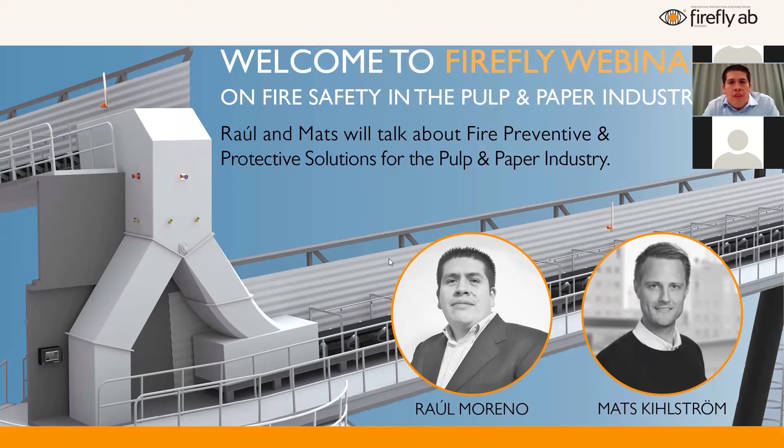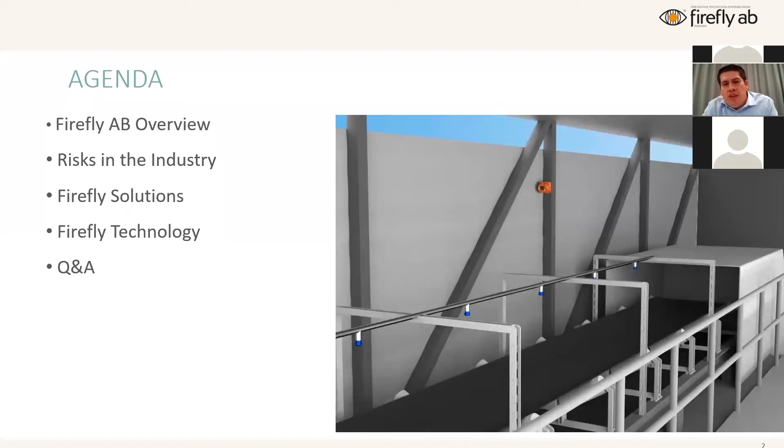So we start with a little bit of agenda. We will do an overview of Firefly. We will talk about risks in the industry, Firefly solutions, Firefly technology, and Q&A. So if you have questions when some of the subjects pop up and we're talking about it, just put the questions in and then we will look at it.

Okay, so Firefly, we are a Swedish company. We're speaking today from our head office here in Stockholm. I hope that everybody, you and your families, are doing fine, in good health in these complicated moments. We have been in Stockholm for the past 47 years. We are a Swedish company, as I said before. We have different approvals from FM and other organisms.

We are focusing on clients, on the client process, and by saying that, what we do is tailor-made solutions to your process. So we are always looking at the industrial side of things. We have proven reliability, and also we are a global company, meaning that we have a global reach, not only in selling systems, but also in supporting.

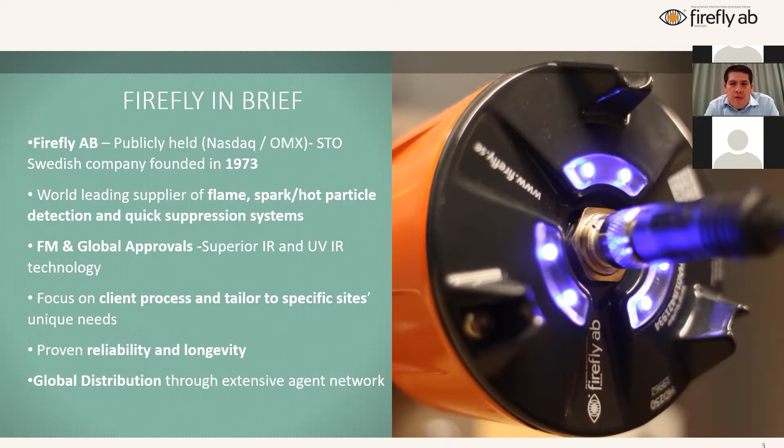As Mrs. Faria was telling you, I'm responsible for the part of Portugal, Spain, and Latin America. But as myself, there are other colleagues that are in charge of different regions of the world, Europe, Asia, North America, and then also my colleague Mats Kihlström, he's in charge of solutions for the pulp and paper industry.

So this is one of the industries that Firefly is servicing as a Swedish company. We started 47 years ago, focusing on wood panel, woodworking solutions mainly. But as the years have gone by, we have specialized in different solutions, not only in tissue or wood-related products, but also in fields so different like recycling, power generation, food, and tobacco.

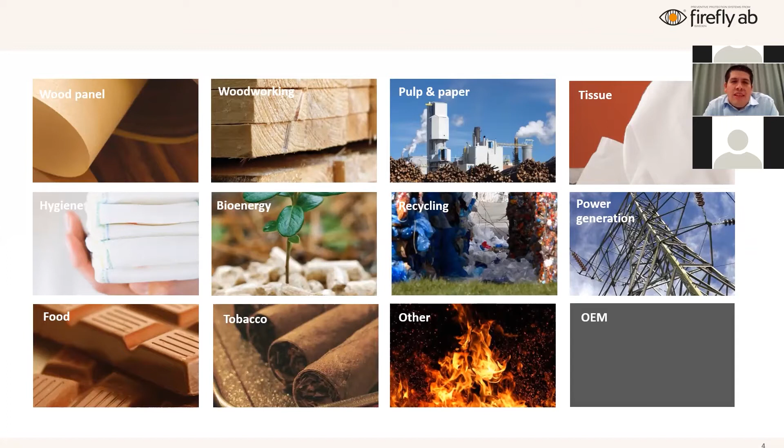So in every process there is a risk of having a fire, not because it is a failure of the process itself, but because the process itself has materials that could cause this fire. That is where Firefly has been focusing on special solutions.

We have, let's say, two Firefly protection system families, and the first one is based on prevention systems. And on prevention systems, we have two main solutions. One is a spark and hot particle detection system, and a second one that we call MGD, or electronic nose. This name may sound a bit strange, but we call it electronic nose because the detectors that we use here actually work like our nose, meaning that, for example, when you're at your home and some of your neighbors are doing a barbecue, you don't see the barbecue itself, but you smell it, and your brain together with your nose identifies that that's a barbecue.

So that's why we call it electronic nose, because this detector is able to detect a fire in the first stages, where only the gas particles are being produced and the reactions are being produced at this level. So in this part of the systems, we are doing detection and extinguishing of ignition sources before the fire or the explosion has occurred.

And then we have a second big family that we call protective systems. In these systems, we have the quick suppression system, which is basically a quick detection of the flames. And when I'm talking about quick detection, our detectors work at around 300 milliseconds. I will talk about that later on. But the whole idea is to detect and extinguish or suppress the fire in less than 5 seconds. Although we have these two families, a Firefly solution often combines both technologies, preventive and protective. This is for an optimal safety solution.

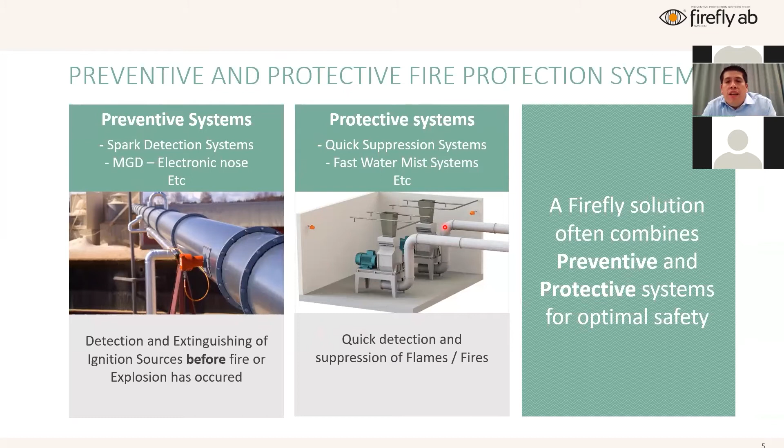Now going into today's main concern, fire risk. Here we have some examples of fires that have happened in different industries in the last couple of years and months. In all of them, we're talking about conveyors. Normally, a failure of a conveyor is caused by friction and overheating of the bearings. In this case, in Sweden, the loss was equal to 20 days of production, and they could only recover 7 months after the incident.

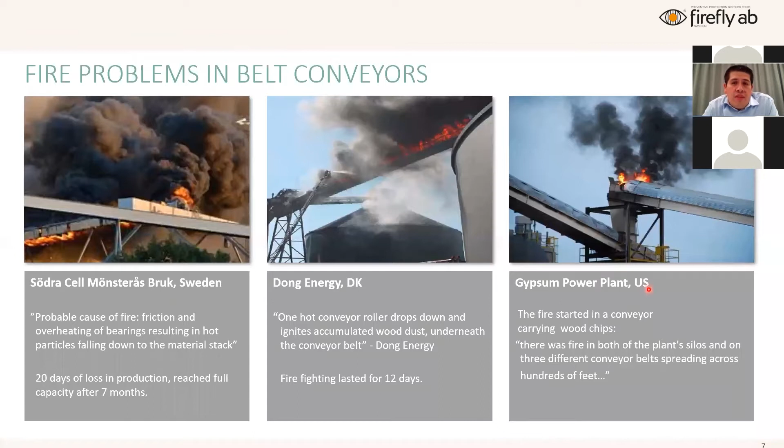This one in Denmark, the firefighting lasted for 12 days. And then this one in the US, it was a conveyor that was carrying wood chips. The fire, unfortunately, was not only on the conveyors, but also in the plant silos. And of course, normally when you have a fire in this type of machinery, the consequences spread to other sides of the factory.

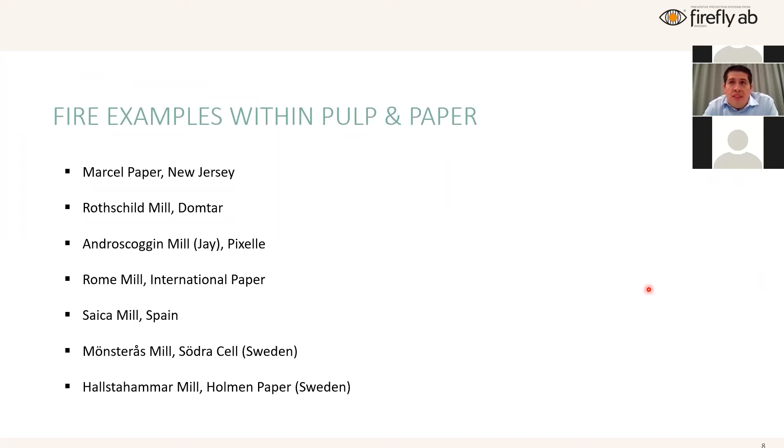Other examples in pulp and paper throughout these last 2 years: we know the tragedy at Marcel Paper in New Jersey, Rothschild Mill in Domtar, closer to Portugal, Saica Mill, they also had a fire there. And here in Sweden, we have Mönsterås Mill and Hallstahammar Mill. So all these examples show us that, unfortunately, fires and incidents related to fire or dust explosions are present in the pulp and paper industry.

After this brief introduction, now my colleague Mats will talk about the applications that Firefly has developed for this market. So I give the floor to Mats. Hello, everyone. Thank you for participating in this webinar. I will talk about different parts of the mills and in what way Firefly can provide protection.

We will start at the raw material handling site. Usually, we say that this part is mostly handling wet wood. We usually say that if the moisture content is above 20%, the material is too wet to ignite. But in the past, we have seen fires even in this area. Roel talked about it before. We have seen ignition sources such as friction from the bearings and the transportation belt in conveyors. And in the debarker or the chipper, we have seen sparks from metal parts that usually are not supposed to be within the process, but sometimes there are.

I can also talk about the accumulation of dust within all these types of process parts. If the dust accumulates, of course, it will dry up and the moisture content will decrease. And if there's a spark or some friction heat from a conveyor bearing or a belt where there is accumulated dust, it's more prone to ignite. And of course, all over the mill we have dust extraction systems, maybe in this part around the chipper and debarker and screener.

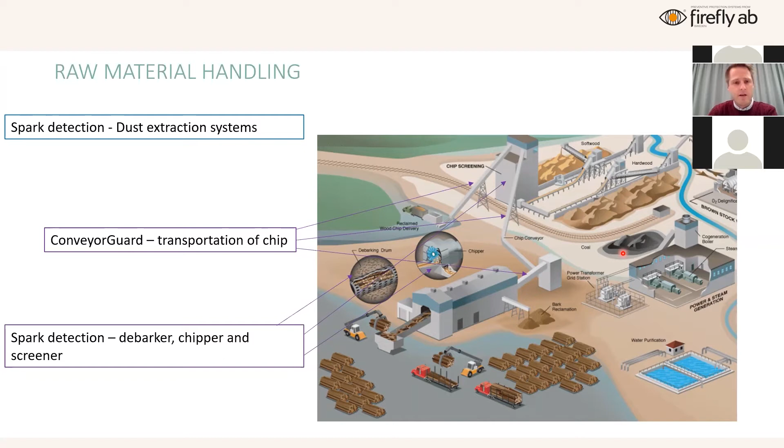That's covering the fire risk areas. And I will now talk about different solutions from Firefly to prevent fires and explosions. And I will start with the dust extraction systems. And it's basically a filter protection. You see a picture of it on the right side of the screen.

And first of all, we have our detector. Roel will go into the theoretical side afterwards, but it's basically there to prevent sparks and hot particles from reaching and destroying the filter. And afterwards, we see our power impact extinguishing system with the full cone nozzles. And depending on the diameter of the duct, we place the nozzles in different directions and different places to cover the whole duct, so no sparks or metal embers could reach the filter.

And an option for this application is also a fan temperature monitoring sensor to really have an early detection mode in the fan, because the fan itself can actually work as an ignition source as well. And if you apply this option, you can have an early detection and see what's happening in the fan.

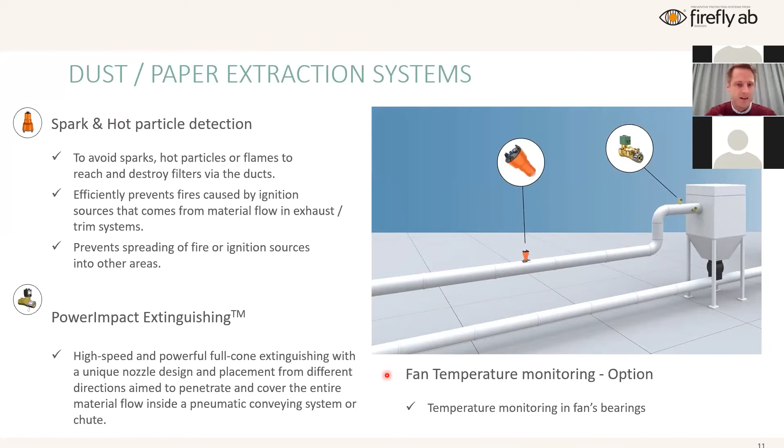Moving on to the conveyor guard, and that's of course protecting different conveyors. And both in a pulp mill and paper mill, there's usually long conveyors. And Roel earlier talked about how we combine both the preventive and the protective systems we have, and conveyor guard is one solution where we do that.

So first of all, we see in the chutes here and over here, we use our preventive system, the spark detection system, with the same detectors as we used in the dust extraction system and the same type of nozzles, the full cone nozzle. And depending on how wide the chute is, of course, we need numerous nozzles.

And if we move on to the actual conveyor itself, this part, we use the protective system with a flame detector that detects flames instead of metal embers and sparks and hot particles. And we use water mist on the actual conveyor belt.

An option here on the conveyor guard is the temperature sensing cable, which we see over here. And it pretty much works the same way as the temperature sensor for the fan. It's an early detection, and we usually place it on the bearings and around the belt, because that's where the friction usually comes from. So we can see an increase of temperature if there's actually problems with the bearings in the belt.

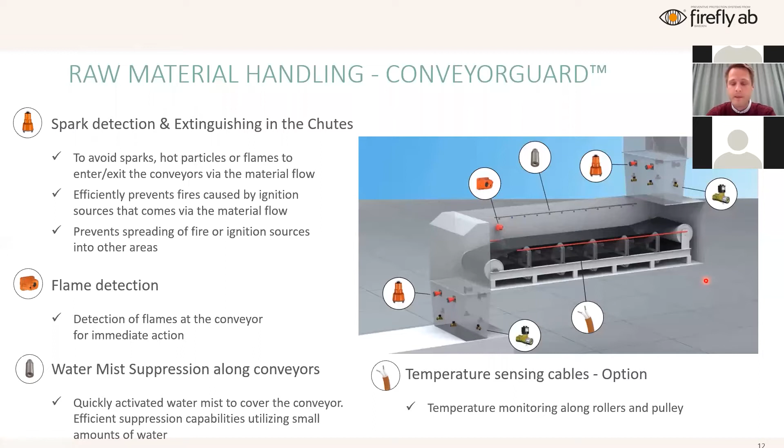And just to show you some movies and pictures of what we're actually talking about. This is an example of our spark detection system, the preventive one. And you see the detector in the middle here. And the guy over here, he lights a match, but then blows it out.

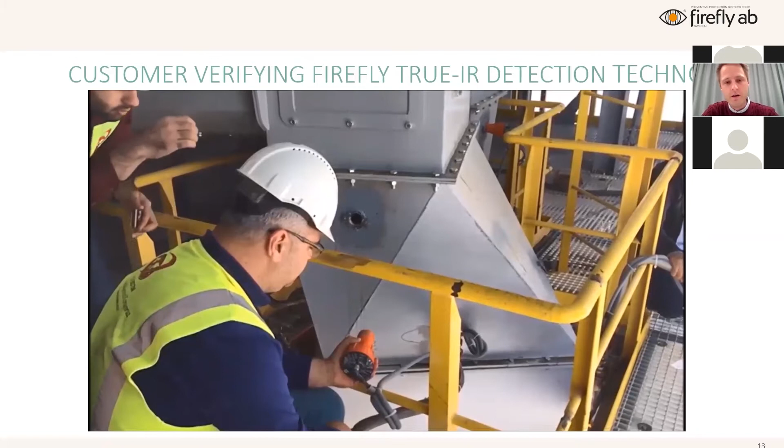Sorry for the delay. But here it's in slow motion. You see the detector is active, the blue lights, and then the guy on the upper left-hand side, he lights a match. But then he blows it out and drops it on the concrete floor. And then here you see our power impact extinguishing system as well, the full cone nozzle.

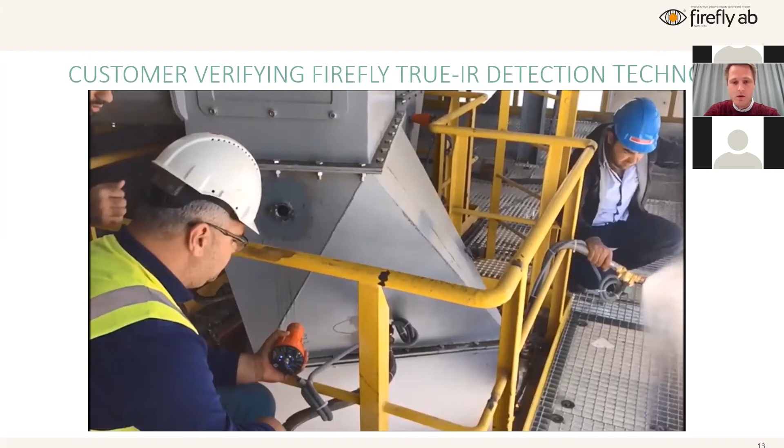So what we actually detect is not only light sparks. We actually detect hot particles, which can heat the material itself. So that's what you see in this movie.

Going forward in our mills and our risk areas, we go to the pulp mill. After the raw material handling, if we produce pulp, there's a pulp mill, and if you produce market pulp, you dry the pulp and then you bale the pulp. And we've seen fires within these two process areas before. And of course, in a pulp mill, you have dust extraction systems as well. I will not talk about that so much now, as I already told you about it.

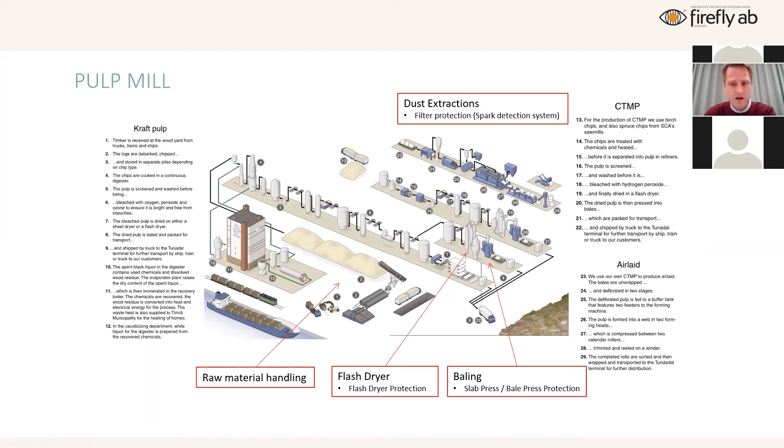But talking about the flash dryer, the pulp dryer, depending on how it's built and how big it is, we implement different types of spark detectors. So this is a preventive system with spark detectors and full cone nozzles within the ducts and after the drying stages.

One important thing to say here as well is that I was talking about accumulation of dust within conveyors. There's also a possibility of smoldering material within the ducts in a pulp dryer. And of course, if there's accumulating and smoldering material within a duct that's heated up, the risk of ignition and a fire is, of course, increasing.

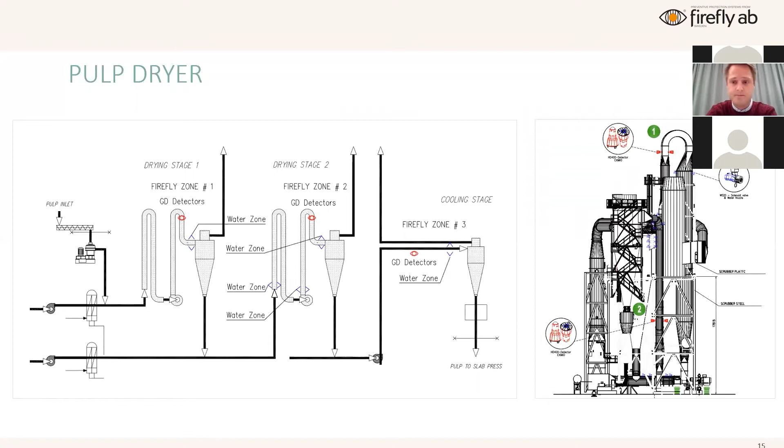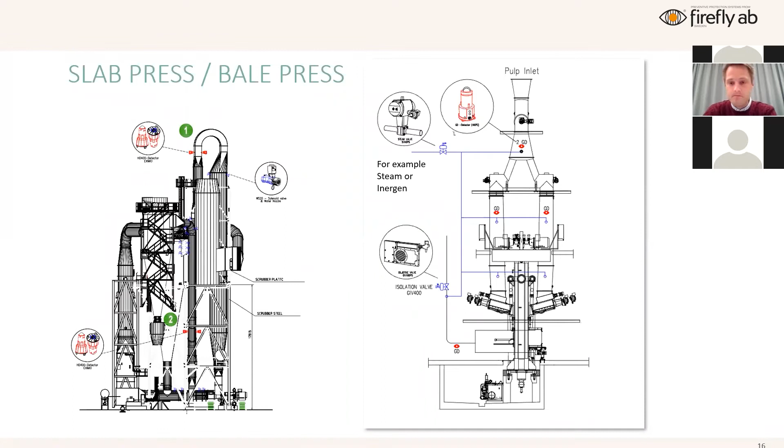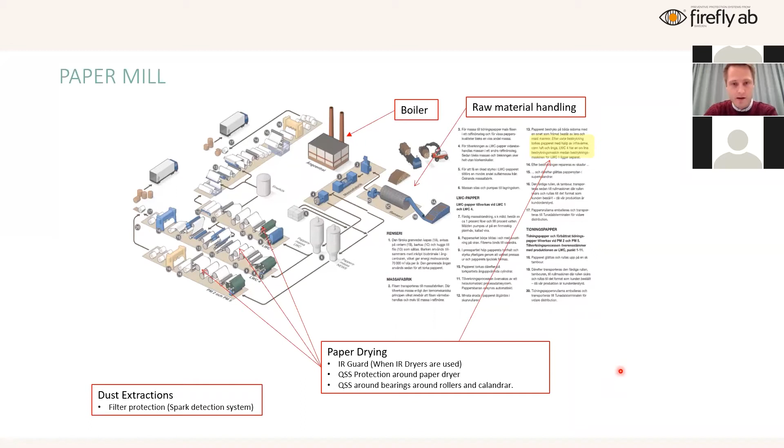If we start at the boiler, it's very common for the fuel to be wood chips, biomass fuel. And if we look at the right-hand side, we see the loading station, where you come with your truck, your train, or whatever to unload the fuel. And in this area, we have delivered flame detectors. So it's detecting flames from the actual fuel.

And of course, the dust extraction systems all over the boiler. But if we go further down the stream, after the loading stations, we have fuel feeding sections into the actual boiler, and it's usually some kind of chutes and conveyors. Within a boiler, there's usually not as long conveyors as in the whole mill itself. So sometimes we combine the water mist solution within a conveyor guard with backfire protections within the chutes.

So as Raoul told you before, we make the application suitable for each part of the mill and each customer, so it suits the actual location perfectly. It's not very common, but sometimes there's a mill and a screener in a boiler as well before the fuel actually ends up within the boiler. And of course, a mill and a screener is a dusty area, so that's a risk as well, where we use our spark detection system.

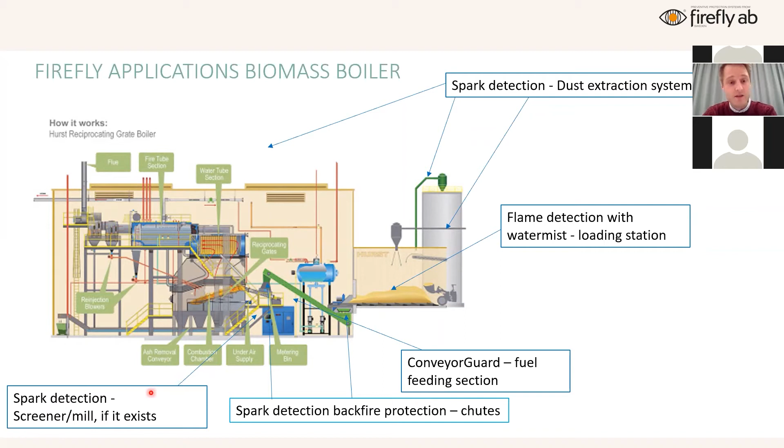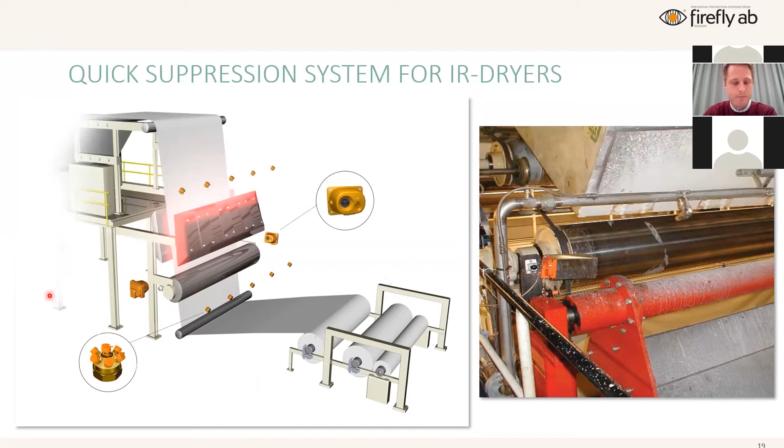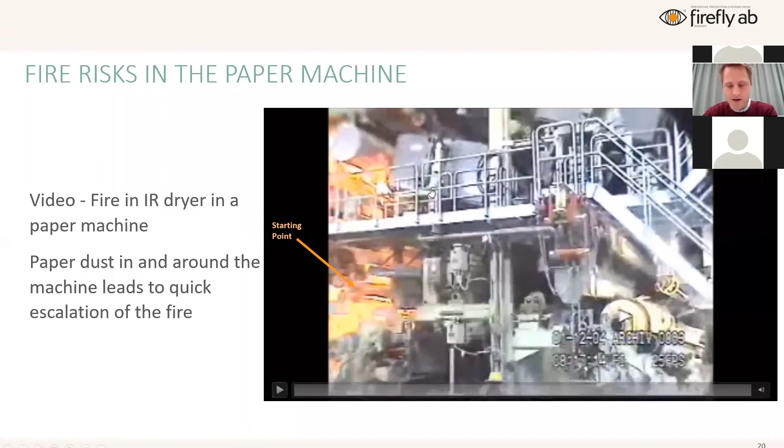I could also state that in a new paper machine, the drying section is usually kind of moist and wet, since these calendars use steam to dry the paper web. So if it's a new paper machine, this area is probably very moist and wet to start with. But the fires we have seen here at Firefly are mostly on older paper machines, where the bearings might not be maintained as well as they have to be, or obsolete. So of course we look at the actual fire scenarios as well before we implement our systems.

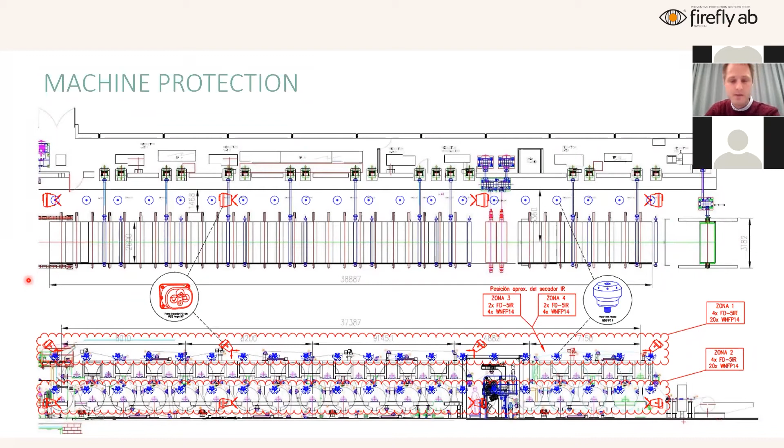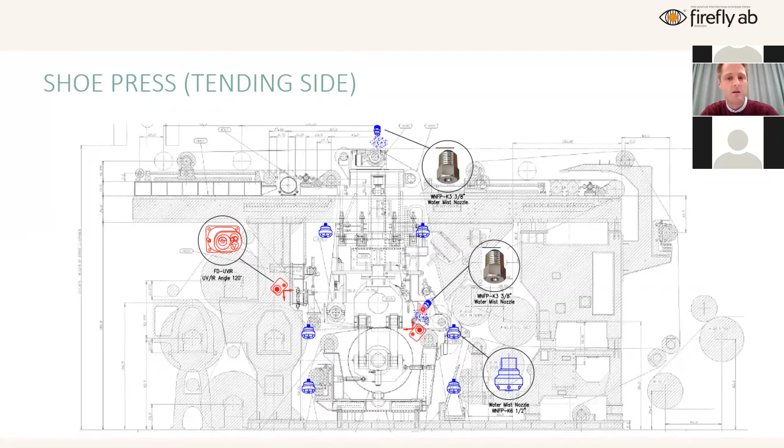And the lubrication and hydraulic oil hoses usually come on the drive side. So the quality of the connections on the hoses is of course an imminent risk as well. If there are bad hoses, we need to protect them as well. So this is something we think is a very good implementation for these kinds of shoe presses, because we've seen fires where they're not protected at all. These machines haven't been protected before. So this is something we think could help different pulp and paper industries.

Last but not least, we have the corrugator, where you produce carton boards and corrugated boards. These boards, of course, are not as soft as paper sheets. The web is not as soft, so maybe the risk is not as big as in a paper machine. But we have seen fires, and we have implemented applications before.

And what we have been doing then is mainly at the slitter scorer, because that's where we chop up the board, and it gets dusty. And alongside the heating plates, where the ignition sources come from, we've seen fires around this area, and in the enclosed dust extraction systems sucking dust from the slitter scorer.

But we've seen also risks and accidents within the single facers and the double backers, mostly around the bearings, where friction and heat from the bearings is the ignition source. If dust accumulates on the bearings, there's a possibility of fires around them.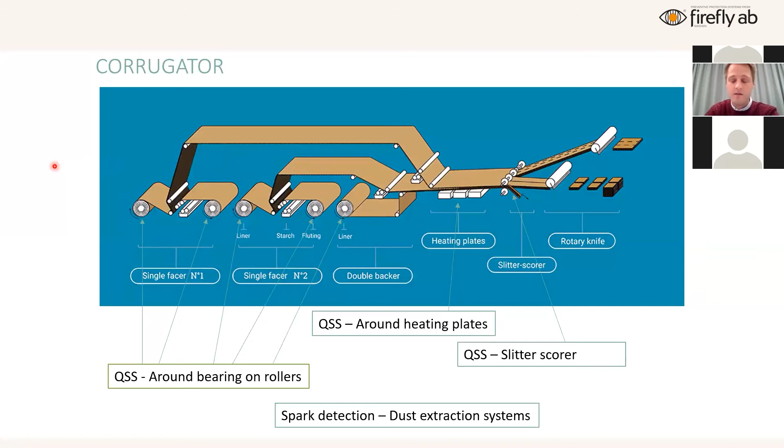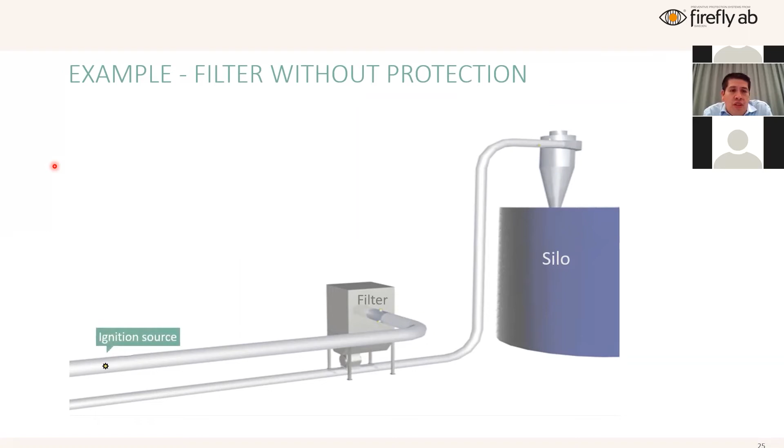Thank you, Matt. Continuing talking about spark detection. Matt's already talked about our solutions for filters and silos. Normally, what you will have in a filter or silo without protection is an ignition source that enters and creates a fire. What we have done with our systems is create a spark detection system which identifies that dangerous particle and extinguishes it before it could create a fire or dust explosion.

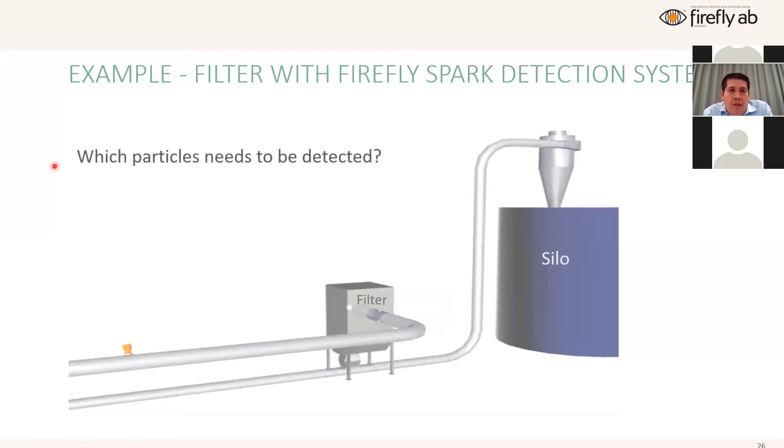But this creates a second question: which particles need to be detected? Which are the dangerous ones? The dangerous particle is one that has enough temperature and enough energy, meaning both are above their minimum ignition temperature and minimum ignition energy. They need both components—if they don't have both, they are not dangerous particles. For example, you could have a spark over 1,000 degrees Celsius, but if the energy or mass is very small, it will not create a fire.

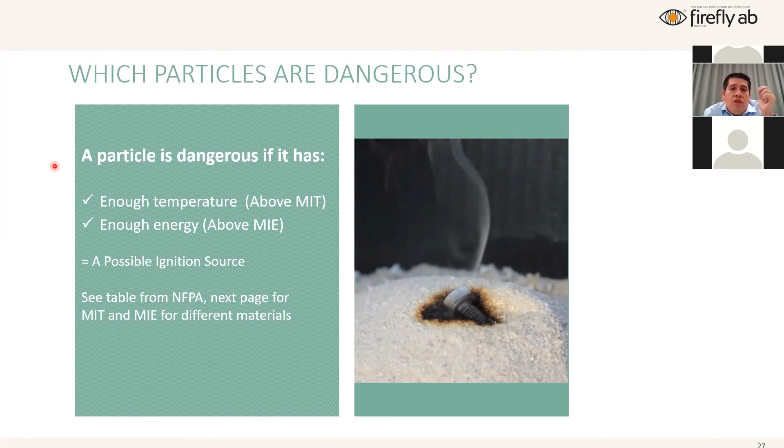On the contrary, you could have a bolt like the one in this image with a low temperature, say 200-300 degrees, but very high energy, and this will create a fire. Talking about cellulose, for example, it has a minimum ignition temperature in a cloud of 480 degrees when it's in a filter. But if the cellulose is in a silo, in a layer, the temperature goes down to 270 degrees, because particles are in contact with each other, so the energy and temperature needed to create that fire is less—about 0.08 joules.

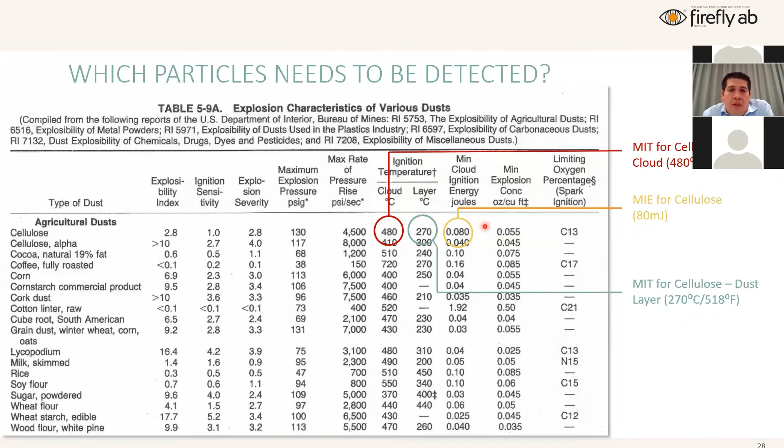So what our detectors are constantly doing is checking all the particles coming in front of them, verifying whether they pass these conditions: minimum ignition temperature, whether cloud or layer, and minimum ignition energy. If the detector finds both, this will create an alarm on the process.

This is what we do, and even though our detectors look basically the same from the outside, the inside changes. As I mentioned, you have minimum ignition temperatures on layers, which are normally lower. So we have a family called HD250 that will detect dangerous particles starting at 250, and the HD400 that identifies particles starting at 400. Both of these are below minimum ignition temperatures.

If you compare our technology to the standard technology in the market, which has been there for many years before us, they use a photo detector, a silicon photocell—the same cells used in calculators, which need light in order to work. The normal silicon photocell detector is designed to detect light. But as you know, and as shown in this table, that's not a good measure, because you could have dangerous particles that are not emitting light, and those could still create a fire. That's why we developed this technology, so you could identify these hot particles.

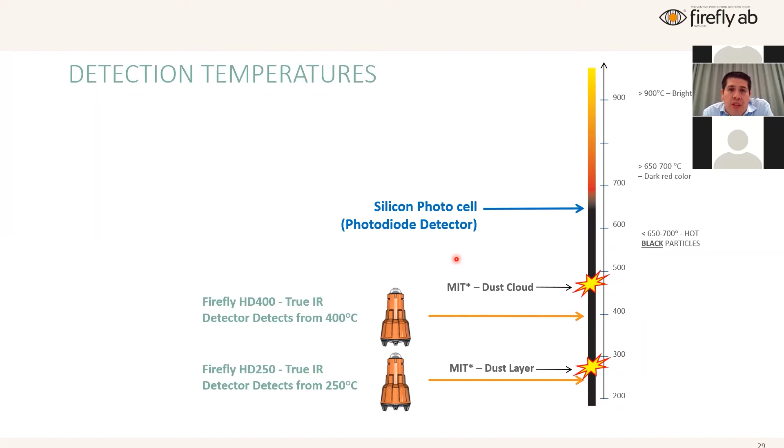A long time ago, we believed that spark equals fire, but that's not the case anymore, because all bodies, in order to start emitting light, need to go over the threshold of 650 degrees Celsius. After that is when a body starts to shine or emit color or light. So there's a whole spectrum of temperatures that will not be detected by a common silicon photocell detector. This technology also means our detectors are not sensitive to daylight, as Matt showed in the first video when one of our customers was testing the system.

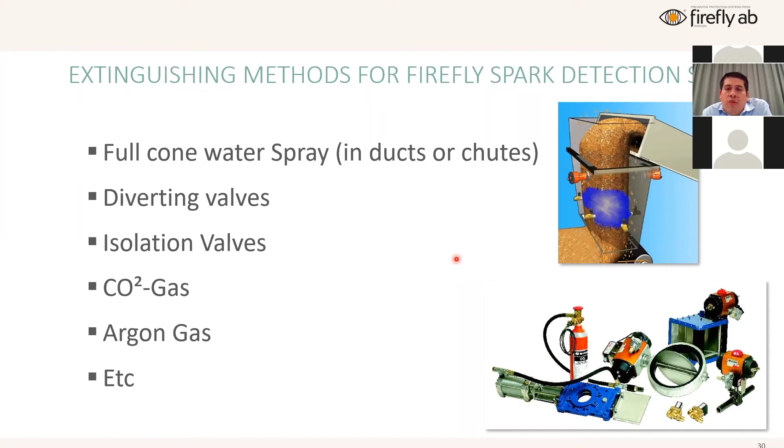Extinguishing methods for our spark detection system, Matt's already talked about a little bit of this. Of course, full cone water spray nozzles and water immersion nozzles are basically the main solutions, but also we have other extinguishing methods like diverting valves, isolation valves, CO2, inert gases, argon, steam, depending on the application that we want to protect.

We are not the ones saying that we do this. We went to FM Approvals and asked them to test our detectors so they could confirm that we are detecting from 250 and 400 degrees. Actually, it took us a little bit longer than a normal certificate from FM would take, because we wanted to have these measures in our certificate. So we are basically the only company in the world that has an FM approval for spark detectors and hot black particles where the certificate states the temperatures at which we can detect.

Also, a question that comes up many times is that our systems are also ATEX approved, meaning that they could be installed in ATEX environments, zones 20, 21, or 22.

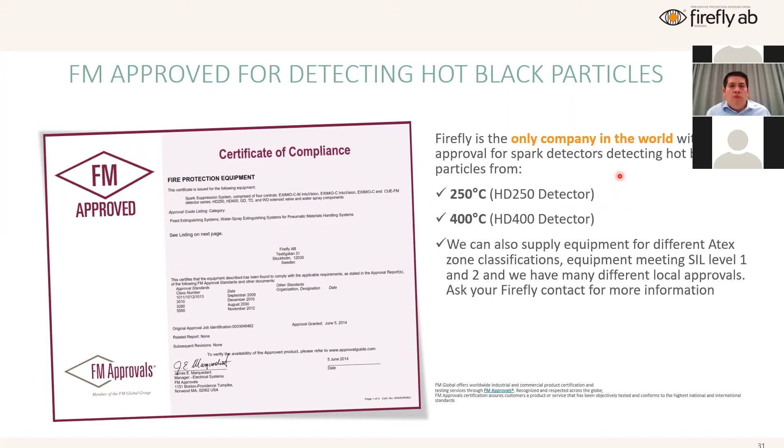This is part of one of the solutions. The second solution is based on what we call the quick suppression system. Quick suppression systems are a complete system designed for extremely quick detection and suppression of fires. As I told you, detection times of our flame detectors are normally around 300 milliseconds, and from that point until we start extinguishing takes less than a second.

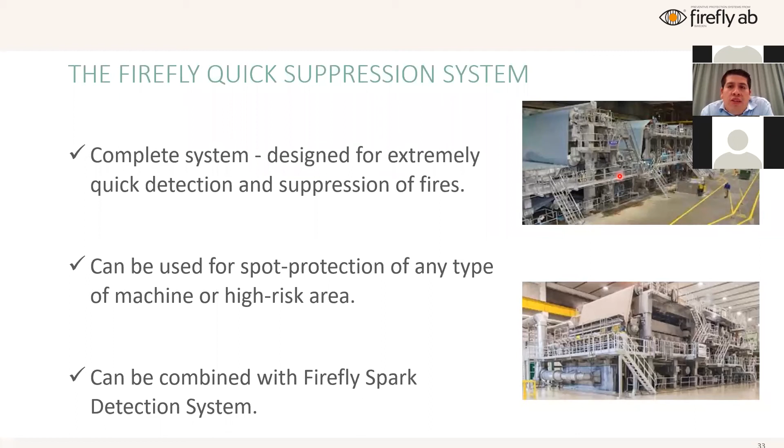Normally we use this to make spot protection of any type of machines or risk areas. Today we're talking about pulp and paper machines, but we also use these same solutions to protect tissue machines or log saws in the tissue industry, or planers in the woodworking industry. Of course, these types of solutions can be combined with a Firefly spark detection system. As Matt was telling you, in paper machines we will have a section that could be spot protected with a quick suppression system, but also a dust extraction duct that will be protected by a Firefly spark detection system.

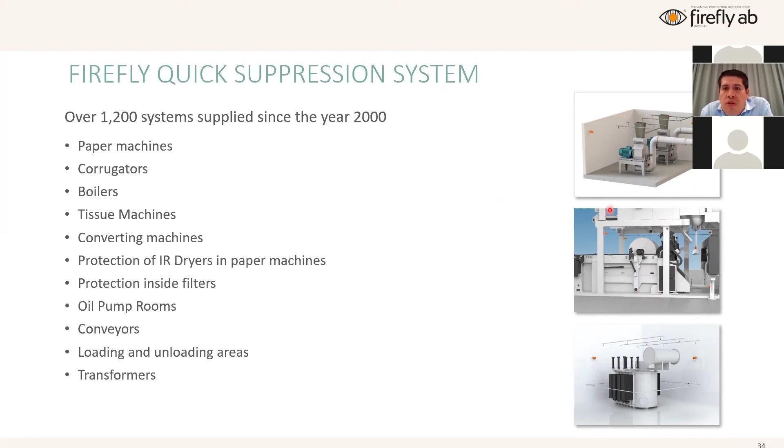Since the year 2000, when we created this concept, we have sold and supplied more than 1,200 systems in different types of applications: paper machines, corrugators, boilers, converting machines, IR dryers, transformers, loading and unloading areas, protection inside filters, and other applications, always looking to protect the risk on specific machinery or in a specific spot of the factory.

As I mentioned, we have fast response flame detectors, all part of our family of flame detectors. Depending on the application, we have a 5-channel IR detector, and a flame detector that uses not only IR but also UV, which makes it very strong and fast. When we just need IR, we use a 2 IR band detector.

Then what we use is a quick acting water mist. Why do we use water mist? Because it will not create a thermal shock on the machine. In paper machines, regardless if it's tissue or another type of product we're producing, our customers are normally worried about the amount of water we are using. So what we do is use water mist.

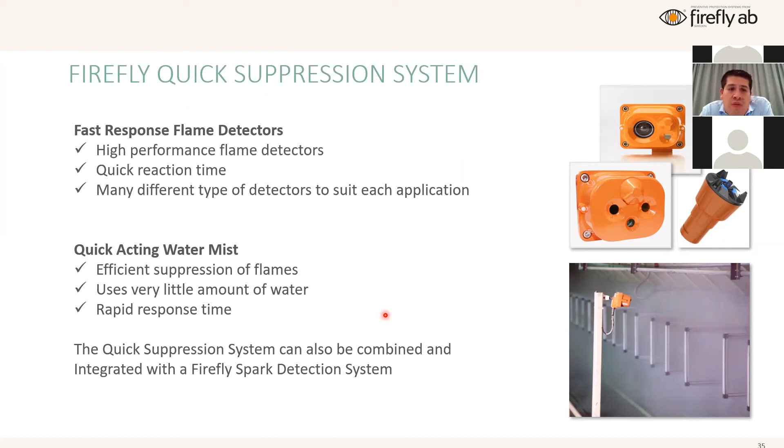As you can see in the picture, this is basically like the mist you'd have on a morning of any given day. It's not water thrown directly at the machinery, so it won't create that shock. Once the mist gets in contact with high temperatures, it expands as it changes from liquid to gaseous state. This causes the volume of that particle, that drop, to grow more than 1,700 times. This means the oxygen is then displaced, and that's how we put out fires. It's not by the action of water itself.

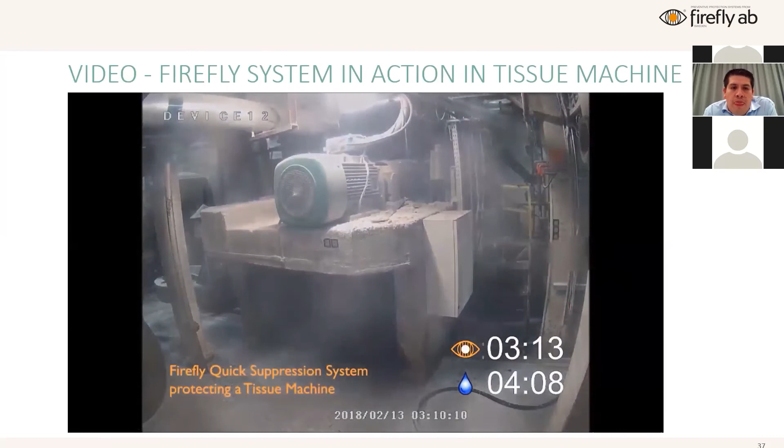Our detector identifies it and starts extinguishing with the water mist system. In less than 5 seconds, the fire has been totally controlled. The operator was used to fires, unfortunately, so you could see it in his body language — he's kind of surprised that it's already out. This is what we call a quick suppression system. Once again, less than 5 seconds, and the total amount of water we used was 6 liters.

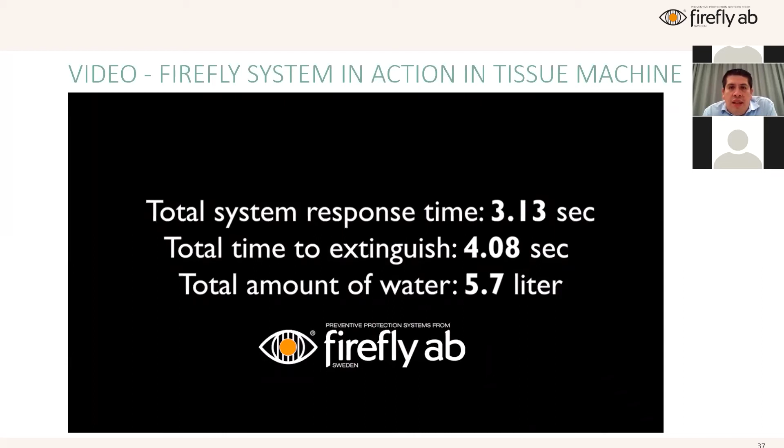And what's important is that downtime is kept to a minimum. Factories can go back to work as soon as possible.

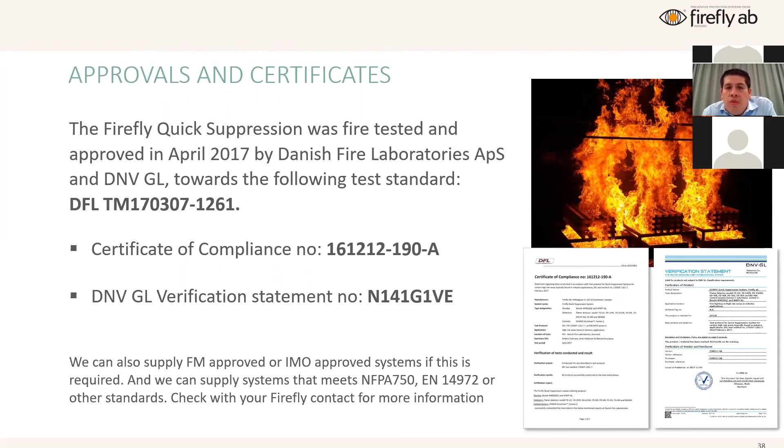We are certified, and we are also approved by IMO towards NFPA and EN. Before going to the question section, if you already have some questions, please start typing them in the Q&A section.

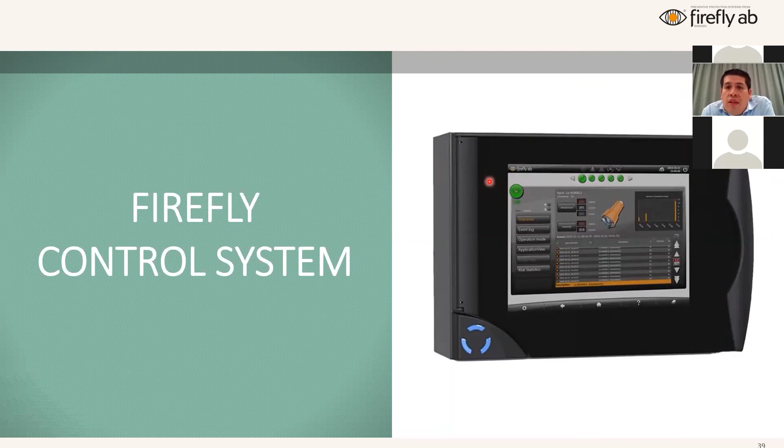Our control system is this screen, as you can see in this first slide. It's a touch screen and friendly for the operator. Everything is based on colors: when everything is fine, it's green; if we have an alarm, it blinks yellow; if we have a detection, it blinks red. This gives the operator the most information possible in the easiest way.

Also, our system is modular and decentralized, meaning that even if there is no communication between the main unit and the secondary control units at the sites they are protecting in the process, these auxiliary control units will take over and keep the process safe.

It has a backup battery that will last between 4 and 6 hours.

Also a very characteristic feature of this system is that we have the possibility to connect remotely. In these times of COVID-19, this has proved to be a really good tool for us, because we have been able to connect with our customers and provide them with real-time support.

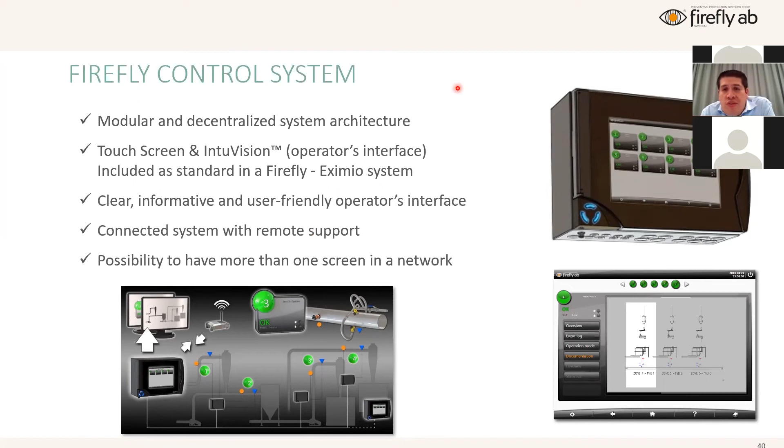This connection could be done via Ethernet or via 4G modem, where you need to install a SIM card in the back of the Eximio unit. Then we could connect through our different support centers here in Sweden, Spain, Portugal, depending on the region.

The control system also shows you each of the detections that the detector has had. It has a log that will give you this information, and it could store more than 2 million records.

You could also see the status of temperature and humidity. In applications such as monitoring bearings, we could give you a trend so the operator knows what's going on, and we could have multiple alarm levels, meaning we could have a pre-alarm so the operator knows something is going on and has time to check.

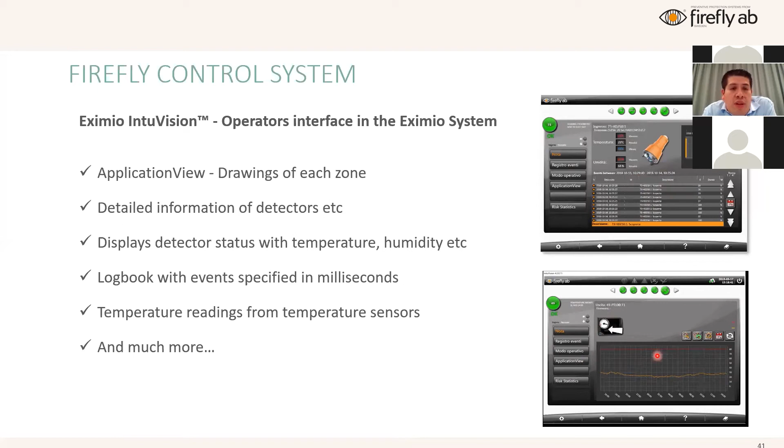And we could have an alarm, which in this case is the red line here. If the detector reaches these levels, the system will activate automatically.

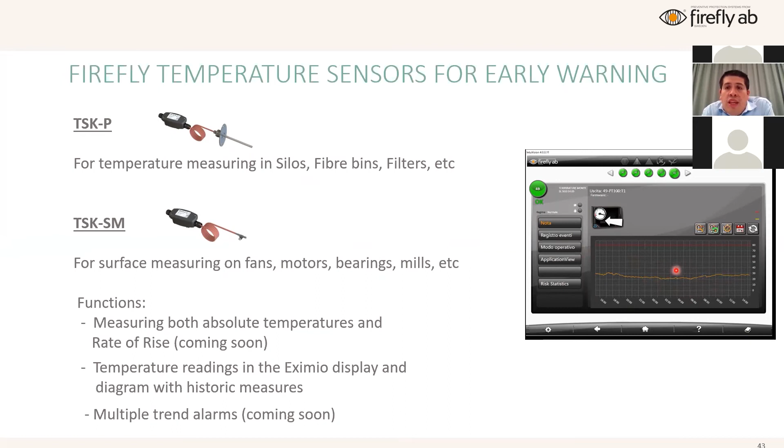With this, we pass to the final section, which is other modes of detection. As we mentioned before, we have temperature sensors for early warning that could be surface mounted on fans, motors, or bearings, or in places and containers like silos, fiber bins, or filters. This will give you a trend so the operator knows if something is coming.

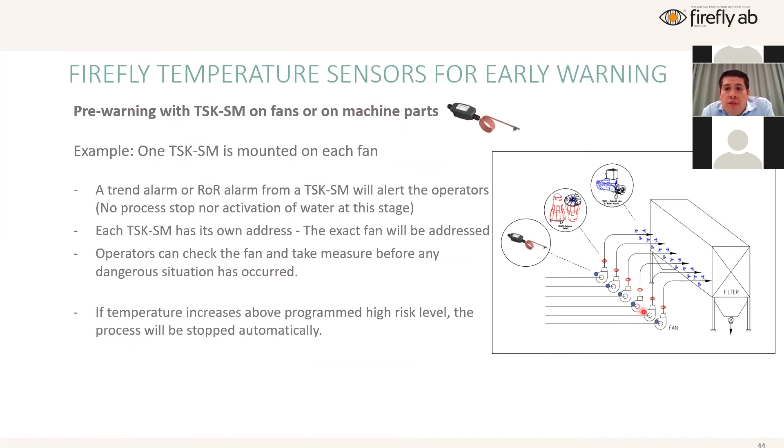We have this application also at the outlet of fans. And then last but not least is what I was telling you, the MGD - this is the electronic nose.

This electronic nose is designed to give you an early warning of any starting combustion. The detector is able to identify different types of gases like CO, CO2, NOx, and aromatics. It identifies a gas pattern and tells you, many hours in advance, that there is something going on in the volume you are monitoring.

This detector is designed to be installed, for example, inside silos, inside grain silos. As you know, this is a very dusty environment, and since we designed this system we install it not only inside grain silos, but also in other areas.

We also install it in warehouse areas, in biomass applications, and also in alternative fuel solutions - different solutions where you're storing a material that could ignite for any given reason.